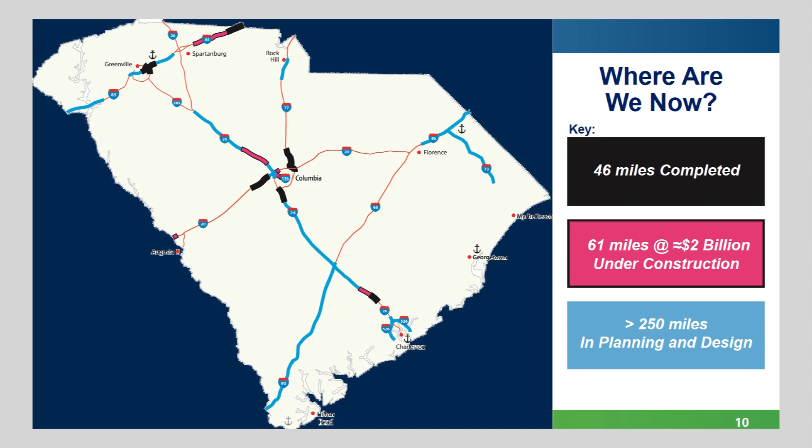You can see on I-26, we've got some that's been completed and some under construction. There's a lot of I-95 currently under development that will start construction soon, basically the entire I-95 corridor up to I-26.

Right now, the first 33 miles are under design. We signed contracts for miles 22 to 33 and 8 to 21 earlier this month to start the design process for those.

Now we'll get into the project background for mile 0 to 8. It really starts at about 1 mile within the state of Georgia at the Knoxboro Creek bridges. It's a 10-mile corridor because we go about 1 mile north of exit 8 by the time we tie it in and replace the culverts north of exit 8.

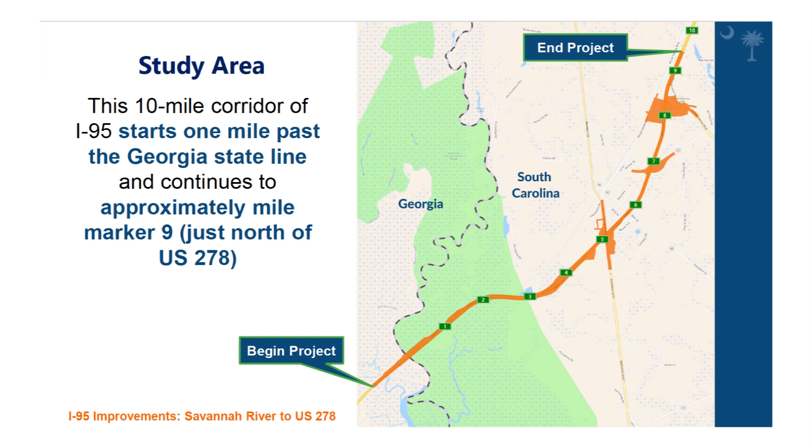The purpose of this project is to improve the capacity, mobility, and operations and address operational deficiencies along the corridor—basically increasing the number of vehicles we can get through, reducing delay, and improving truck travel time reliability, as well as addressing operational deficiencies at exit 5, exit 8, and the bridges, all of which have deficiencies at this time.

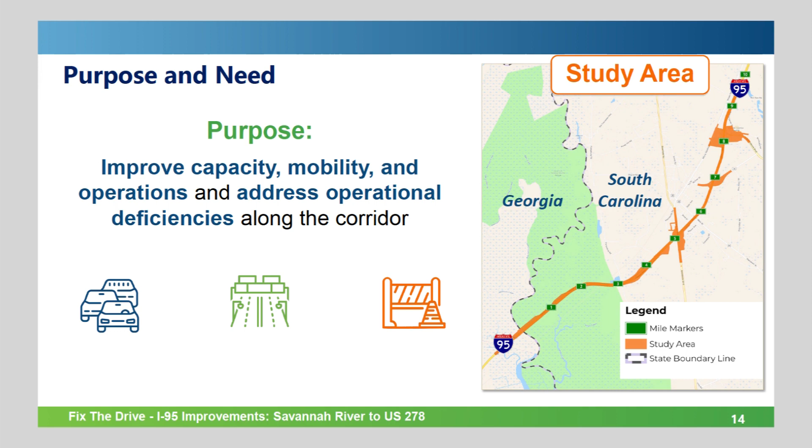So the roadway—we plan to widen towards the median from 4 to 6 lanes for the entire length of the project. Between the state line and just south of exit 5, near the Welcome Center, in the northbound direction, a future 4th lane will be constructed as well. That will be striped down to 3, but that is to allow for construction and maintenance of traffic, maintaining the 4 lanes of traffic throughout the project.

For the bridges, we have 5 sets of mainline bridges within this corridor: the Savannah River Bridge, developed in partnership with the Georgia Department of Transportation; the Savannah River Overflow Bridge; the Sand Island Swamp Bridge; and the SCL Railroad Bridge. All of those are south, basically within the first 3 miles of I-95.

Then SC-46 is over Main Street in Hardeeville, and we also have the John Smith Road overpass as the cut-through between 17 and 278. At exit 5, we're doing a frontage road relocation.

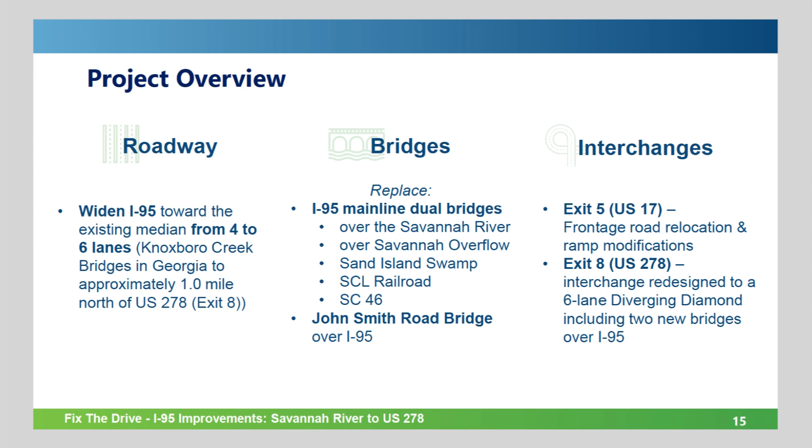There's currently a frontage road that connects through the ramps, which is a huge hazard of people going the wrong direction, potentially trying to get on the interstate. So we want to remove that operational deficiency. We're also going to remove the free flow right turn lane there and pull all of those into a signal. As we started looking at the crash data at Exit 5, almost half the crashes were from that merge movement, people coming off the ramps and trying to merge onto US 17.

At Exit 8, and I do have images that will show these improvements, we'll be replacing the single bridge that's currently there with a pair of bridges on each side of the existing bridge, converting that to a 6-lane diverging diamond section. That'll all be over I-95. We'll also relocate Medical Center Drive because it was currently impacting the operation of the interstate.

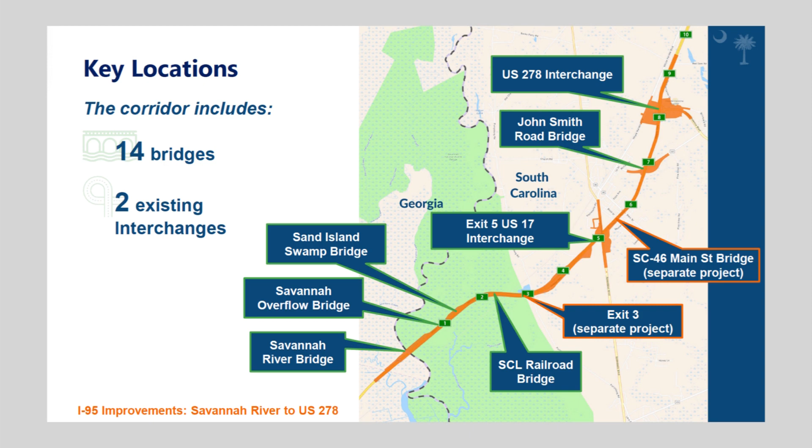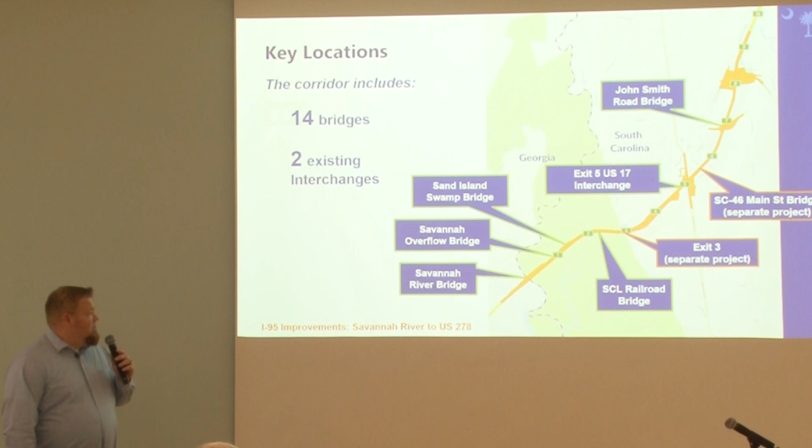This kind of shows you where the bridges are at. You have the Savannah River, the Savannah Overflow, the Sand Island Swamp, SCL Railroad, and the potential future Exit 3 project. The goal of the developer, the city and county is to have that part of I-95 - that's the goal everybody's working towards. It's currently not there, but we're working towards that. Then you have the Exit 5 interchange, the Main Street Bridge replacement, that's SC46 - that's an I-95 bridge over SC46. That's a separate project that's going to be included in the construction contract for this project. There's the location of the John Smith Road Bridge and Exit 8 interchange.

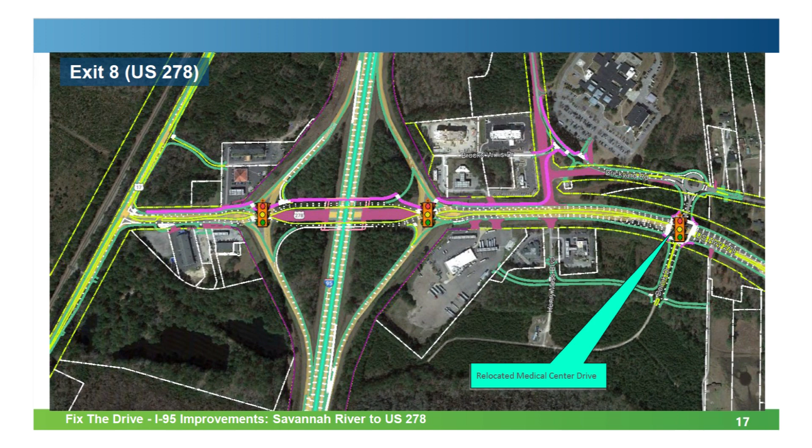That's a conflict movement across traffic. So with the diverging diamond, if you're heading west on US 278 to go south towards Savannah, you would cross over at this light onto the opposite side of the roadway, and then your exit ramp is a left turn - a free flow left - instead of having to cross over traffic and stop. That's a very heavy movement there, so you cross over and it reduces the conflict at those points.

Same thing - if you're coming up here, you've got a free flow here. This is all a 6-lane section. This is where Medical Center Drive is being relocated to; this was the previous location of it. And then we have a hospital - the Coastal Carolina Hospital is sitting here. It comes up through a roundabout, which we coordinated with the hospital to make sure they had a free flow movement for any emergency vehicles getting there, and then it ties back up into the current Medical Center Drive up here.

We've been working through and closing all of the conflict movements and driveway accesses through this area. That helps reduce rear end collisions and also improves the operations of the corridor, keeping traffic from backing up onto the interstate here and here. So the only business that will have direct access off of 278 will be a shared use driveway on this southwest quadrant. All these other businesses will be serviced through this road here, and everything on this south side will be serviced off this frontage road. This ties into a potential future development back here that's a very large development as well.

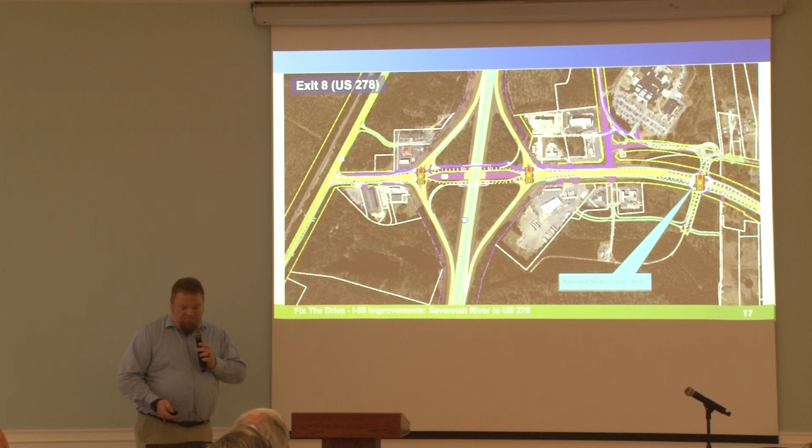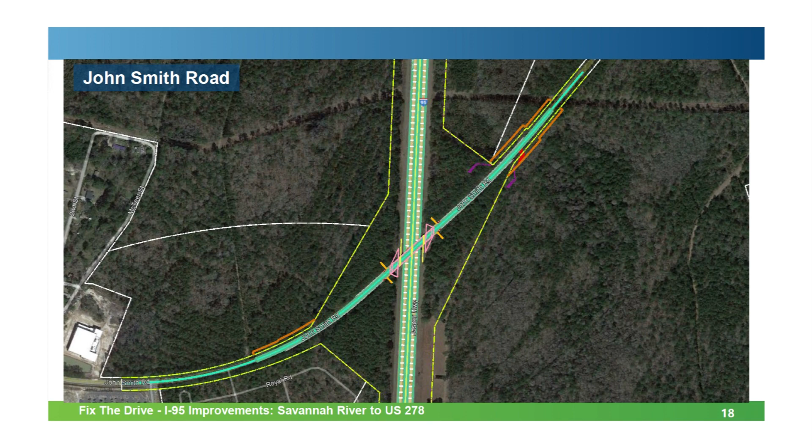One of the things we made sure to put in the contract is that improvements at exits 5 and 8 that impact traffic cannot occur at the same time as John Smith Road is closed. They can't get into traffic at exit 8 and impact that work. They can build the frontage roads, the roundabout, anything that's not impacting exit 8 operations at the same time as they construct this bridge, but they can't get into the roadway at exit 8 until this bridge is replaced.

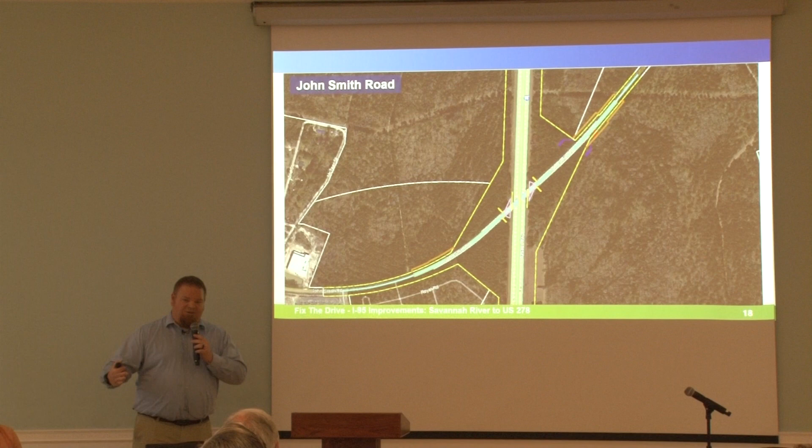So the sequencing would be: exit 5 interchange first, then John Smith Road, then exit 8 interchange. We do plan to implement a construction timeline on exit 8 improvements because it's roughly 30 months for total construction at exit 8, and the overall contract is going to be around 54 months. So we don't want the contractor to push the exit 8 improvements to the very end of the contract—we want it done as early as possible.

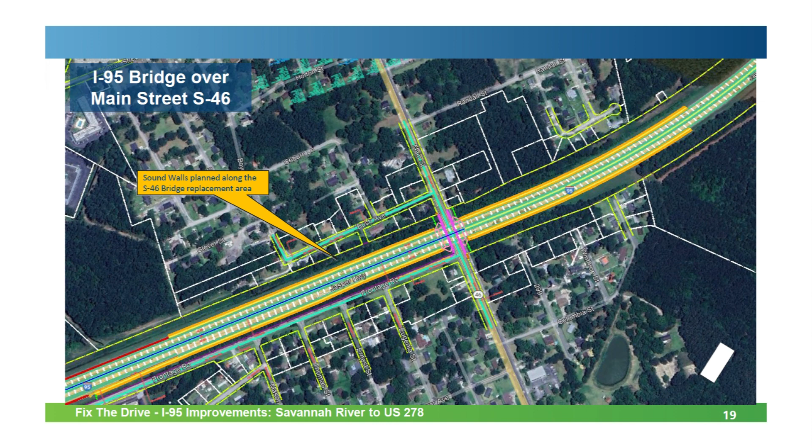So this is the S-46 bridge, located right here, this bridge replacement. We have about 2,000 feet of sound walls on each side to protect the community in Hardeeville. As we did our noise study for the project, this was a requirement for our environmental processing, so we do have noise walls at that location.

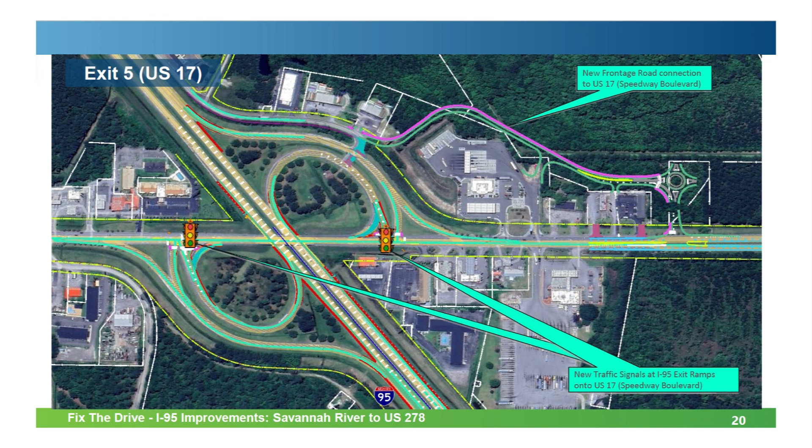All right, so this is exit 5. You can see we're going to signalize each of these ramps. This right turn movement here is being eliminated, same with that movement there, pulling all the vehicles into the signal for both on and off ramps. These ramps will be widened out as they come through here, and acceleration/deceleration lanes will be added on the interstate, longer for that interchange.

This is the frontage road that currently ties through to each of the ramps. It will be removed, and the frontage road will go behind the QT station over to a roundabout that connects back up to Route 17, and it will connect this way to a future development as well.

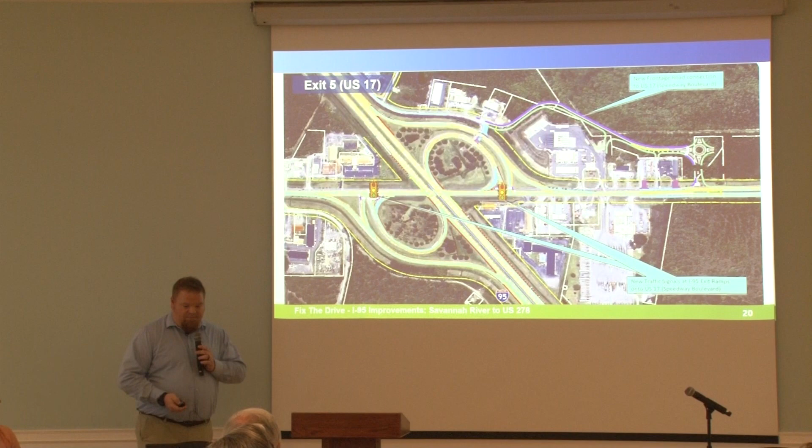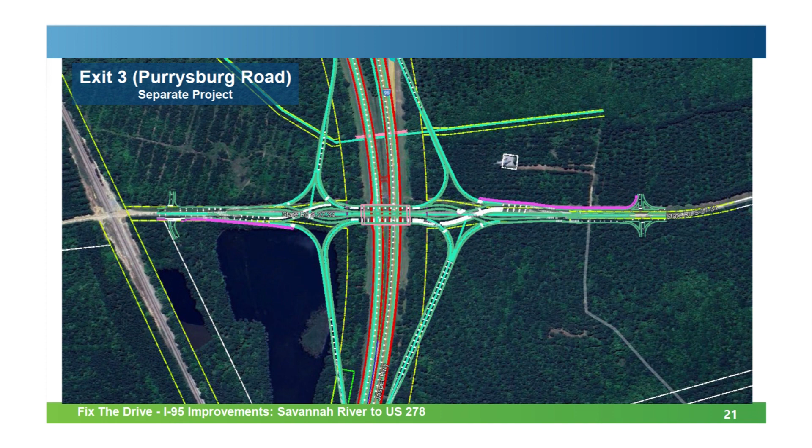This one is developed locally by the developer, with the City of Hardeeville and Jasper County funding this project along with the State Infrastructure Bank. DOT is currently working with them on developing the plans, and the developer and the county are responsible for securing the environmental approval for the project to get it included as part of the project.

Now we'll go through project updates, where we're at on I-95. You can see from June of last year to April of this year, we've accomplished a lot. Typically an interstate project takes approximately 4 to 4.5 years to complete from start to finish—when we give a consultant notice to proceed to when they turn in construction plans, or go to lettings, that's about 48 months.

This one we're doing in 30 months. So we've knocked almost 2 years off the development cycle to be able to meet the schedule given to us of late 2024, early 2025 construction.

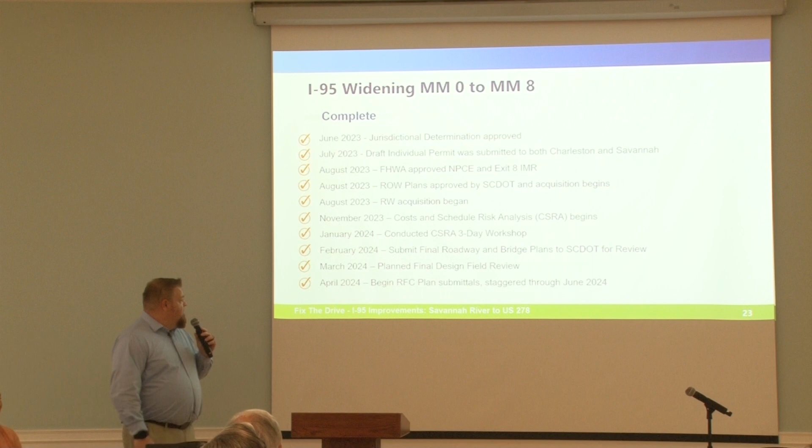So we're currently acquiring right-of-way. We've got about 10 tracts of 40 left to acquire within the next month. We are on track to be able to certify that in June or July. Final plans have been under review since February, and the actual signed and sealed plans will be turned in later this month.

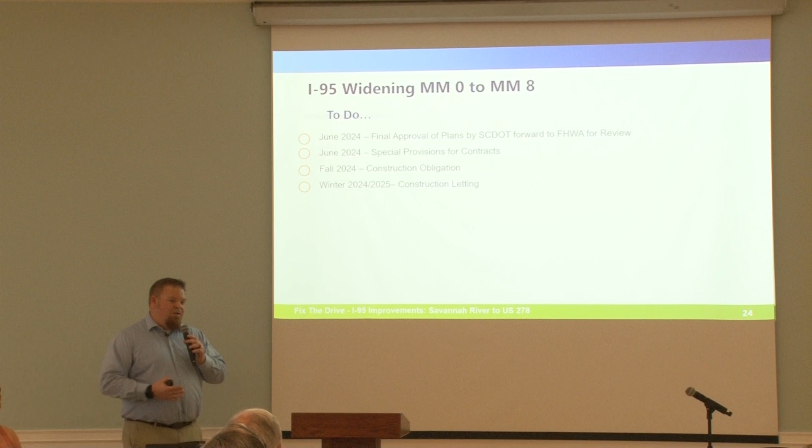Then we'll finalize the special provisions with a construction obligation later this year, and construction bidding late this year or early next year. We're looking at the bids to see if pushing to February might get better bids than December, based on contractor availability and the size of this project. We want to make sure we give them plenty of time to develop their bids.

So this is our project development process. We started in early 2022 with the environmental document, went through and met with property owners, and looked at different options. Specifically, most of the options were focused on the Exit 8 interchange as well as the John Smith Bridge.

As we go through the environmental process, we do alternative analysis, looking at different traffic configurations and interchange configurations to see which one is the least impactful to the human and natural environment, the wetlands, the traffic impacts associated with it, and which one gives us the best traffic performance. We're trying to balance that out, and that's where the DDI came from.

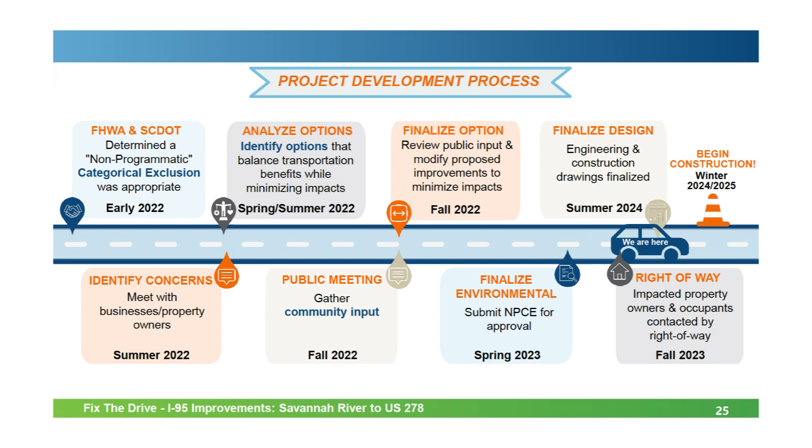Then in the fall of 2022, we had a community meeting at the Island Rec Center in Hardeeville, and we finalized that in the fall of 2022. The document was approved in the spring of '23, and since this summer, or last fall, we started right away finalizing plans.

So these are some of the regional projects that could be of interest, being developed either by Jasper County, Beaufort County, or the Low Country Area Transportation Study, which is a body that manages transportation projects. All the local funding that DOT gives, we provide to LATS so they can plan in the area. That's Hardeeville, Bluffton, Beaufort, and Hilton Head, the main municipalities, as well as Jasper and Beaufort County.

So the first one is SC 170 near-term improvements. Those are anticipated to complete this fall. That's some intersection improvements between 278 and 462, hopeful to improve the traffic flow. 170 does need a lot of improvements. This is near-term, and they'll have some longer-term improvements as well.

They're also looking at a couple of 278 access management studies. The first one is I-95 to Argent Boulevard, and then Argent Boulevard to SC 170. The next one is the Triangle Project, which is 278 to 170 and Argent Boulevard. Those roads connect and make a triangle, that's why they've called it the Triangle Project. That's the long-term improvements for 170 and 278 in that area.

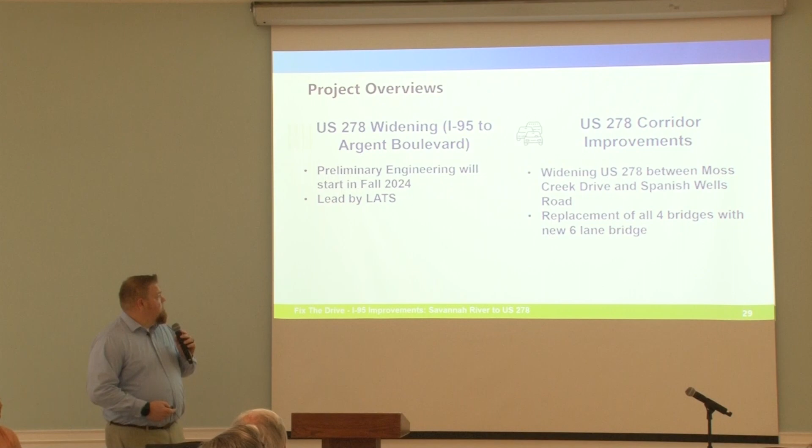This is a great resource that SCDOT has developed, the Programmed Project Viewer, a GIS-based map. Any project, whether it's resurfacing, intersection improvements, striping projects, signal projects, or widening projects, they're all placed on the Programmed Project Viewer, as well as local projects. If we're involved in any way, that's on there. So if there's a question of what's happening in this area, you can either call the DOT or go to the Programmed Project Viewer to understand it.

It'll give you the specific person to contact for that project, whether it's in construction or in development. You'll have the person to talk to.

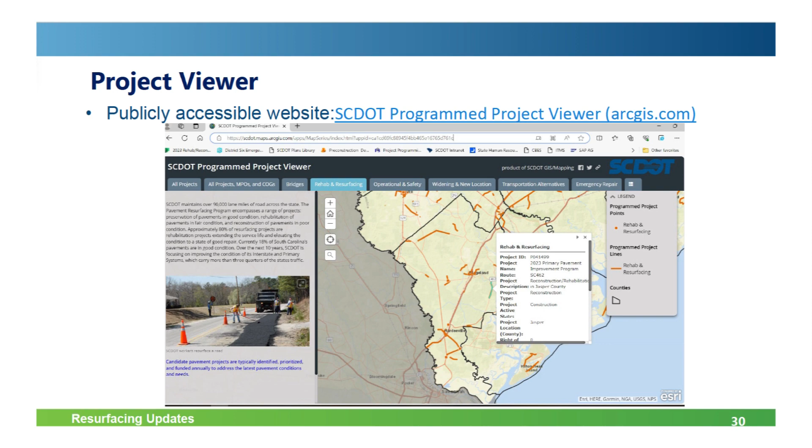One thing I'll put on the I-95 schedule is, early next year, about 4.5 years to complete that, so early 2030-ish would be when the first phase would be completed. They're all being coordinated as they go through there, but it's a long process to complete that project.

A lot of that's driven by the bridge replacements. The Savannah River Bridge with GDOT is roughly a $200 million bridge replacement, so that's a significant, time-consuming project to construct.

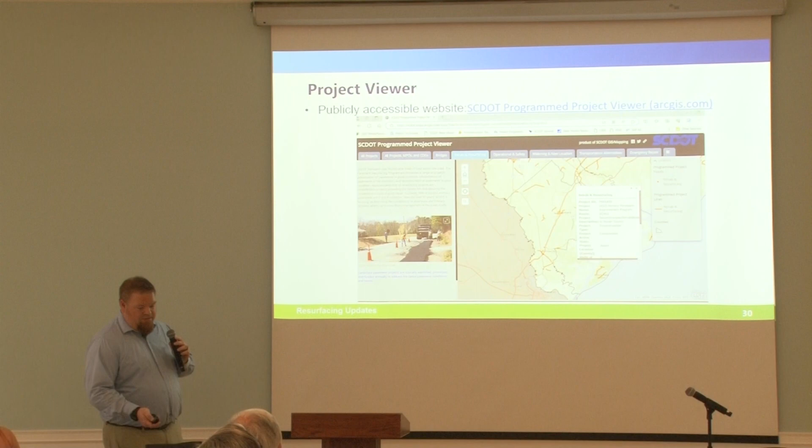And this is how you can contact us for the I-95 project. We do have a project website that is updated. We're also working on developing an I-95 overall project website that has all the projects in the entire corridor. It's currently under review at this time.